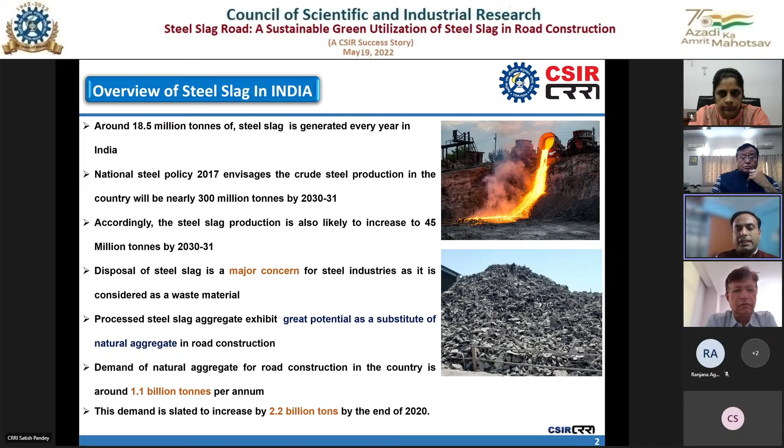By that time, we will have 45 to 60 million ton annual steel production in the country, and the disposal of such huge solid waste will be a challenging task to the steel industry. On the contrary, for the construction and maintenance of the vast road network in India, we require 1.1 billion ton natural aggregate annually, expected to increase to 2.2 billion ton in upcoming years under the massive road development program by the National Highway Authority of India, including the National Highway Development Program, Bharatmala project, and PM Gati Shakti Pariyojana, under which several new infrastructure projects are lined up.

Now, what is the Steel Slag Road? This is the road built under CSIR-CRRI technological supervision and guidance using 100% processed steel slag aggregate as a substitute for natural aggregate and good earth. It's a 6-lane bituminous pavement comprising earthen layers as well as an asphalt layer on top. This road connects NH 6 to Hazira Port.

It's a heavy duty pavement subjected to 1200 to 1500 commercial trucks on a daily basis. The major benefit of this construction is that we have replaced the entire natural aggregate and good earth using processed steel slag aggregate. The aggregates are utilized in the construction of subgrade, subbase, base course and bituminous layer.

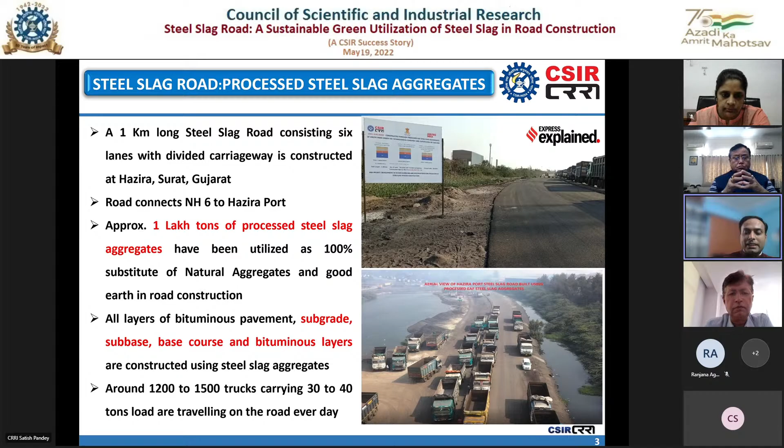Partial utilization of steel slag as a substitute of natural aggregate has been attempted in different parts of the world as well as in India. But the unique feature of this project is that we have replaced the entire natural aggregate and good earth using processed steel slag aggregates. So we built 3 test sections in this project.

The first test section is a control section built for comparative study using conventional natural aggregate. This section is designed for 100 million standard axle repetitions for a 20-year design life. According to Indian Roads Congress prevailing specification, the thickness of the section works out to 625 mm for the road built using conventional natural aggregate.

We kept the length of this control section around 200 to 250 meters. Another test section was built using 100% processed steel slag aggregate without reducing its thickness, with a length of around 300 meters. The third test section was built by reducing the overall thickness of the road by 32%.

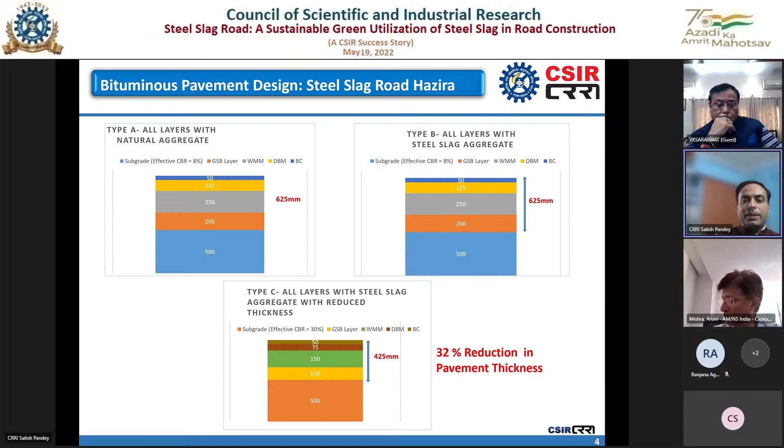So in place of 625 mm thickness, we built the road with 425 mm thickness, and the major reduction was carried out in the dense bituminous macadam layer and wet mix macadam layer, which are considered the costliest pavement layers inside the pavement structure. With the help of that, we significantly saved the construction cost. We evaluated this completely...

I think there is some connection error. Satish ji, are we connected? I think we have lost him. Yes, I think we have lost him. He will reconnect again.

Shall we move ahead with our next speaker? Let Satish ji come and join. Satish ji? I think, Dr. Shikha, can you call him, because this was a very interesting part. Yeah, actually we would like to hear first about the technology.

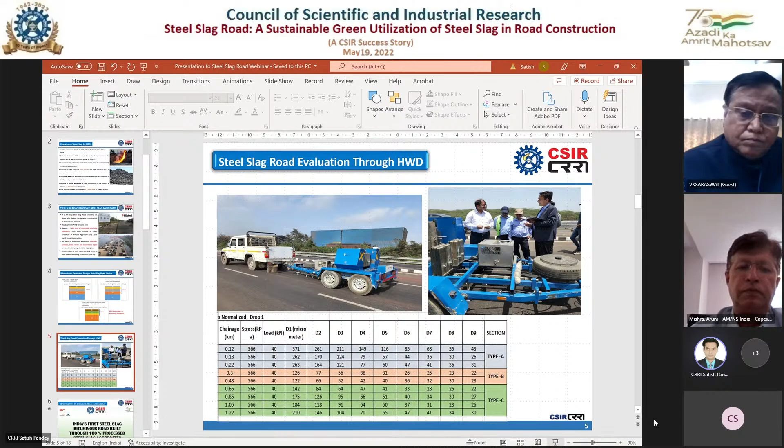In this photograph, you can see the heavyweight deflectometer evaluation carried out on the steel slag road test section. We tested this road as per IRC parameters, and at 40 kilonewton load, the deflection in the road built using natural aggregate is around 371 to 260 micrometer. But compared to the road built with 32% reduced thickness, there is a significant reduction in pavement surface deflection, by 50 to 60%.

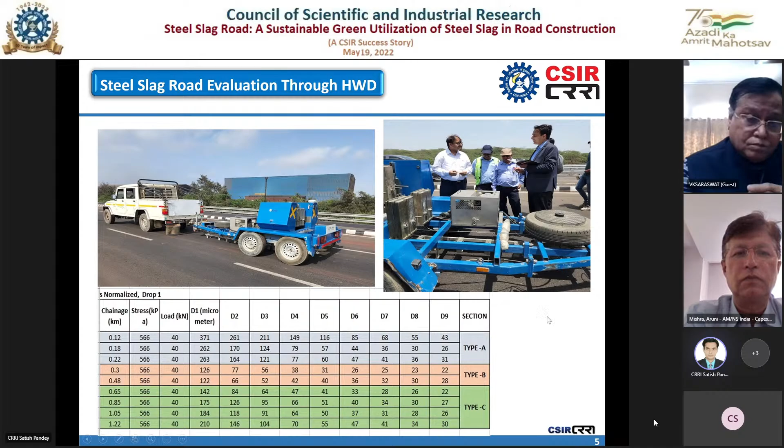By virtue of that, this road is considered stronger than the road built through natural aggregate, and we can effectively reduce its overall thickness by 30 to 40%. This is one of the major benefits of constructing a road using 100% processed steel slag aggregate. We can not only prolong the service life of the pavement, but also conserve natural aggregate and national resources for road construction in the country.

Now this is a small video which shows the journey of the steel slag road construction and processing. I'm just playing it so you can have a glimpse of it.

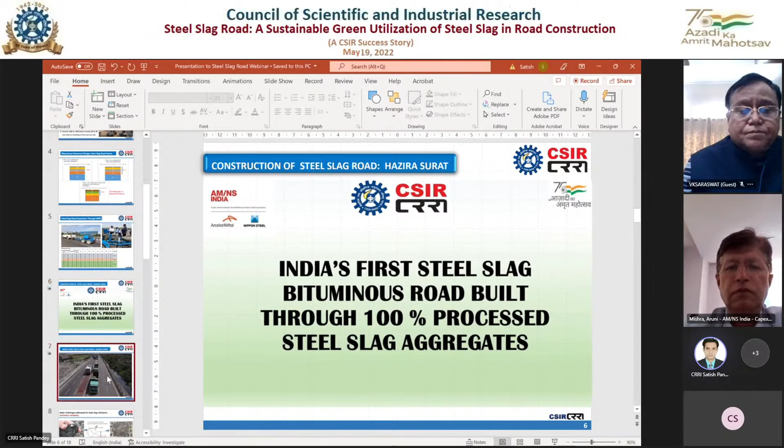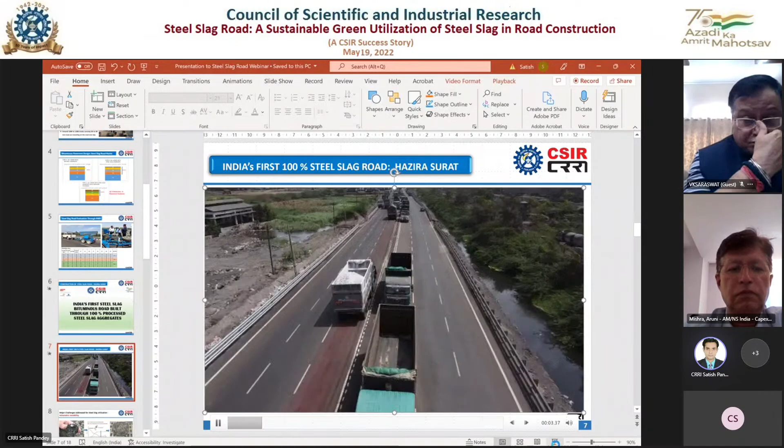This particular short clip gives an aerial view of this road, showing how it looks after construction. We evaluated this road on different serviceability parameters, and it is meeting the different parameters laid down for the construction of national highways in the country.

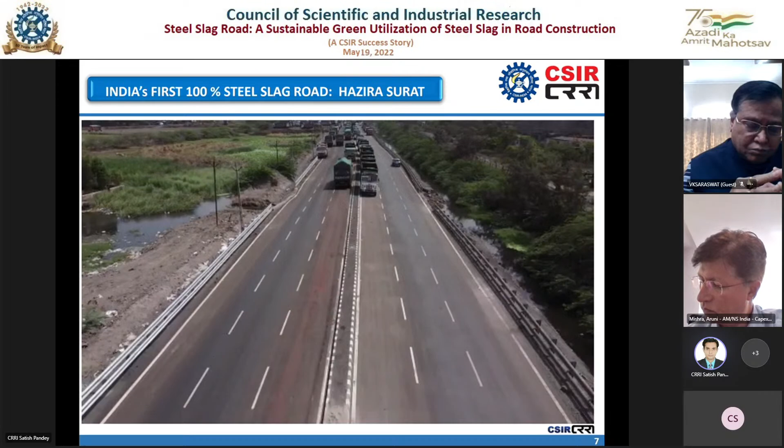This is a glimpse of an overall road, showing what type of traffic it is subjected to. This entire pavement is constructed using 100% processed steel slag aggregate, including median, shoulders, and side drains, all built through processed steel slag aggregate. So it does not contain any natural material inside it. Only in the top layers is bitumen used along with the processed steel slag aggregate for construction purposes.

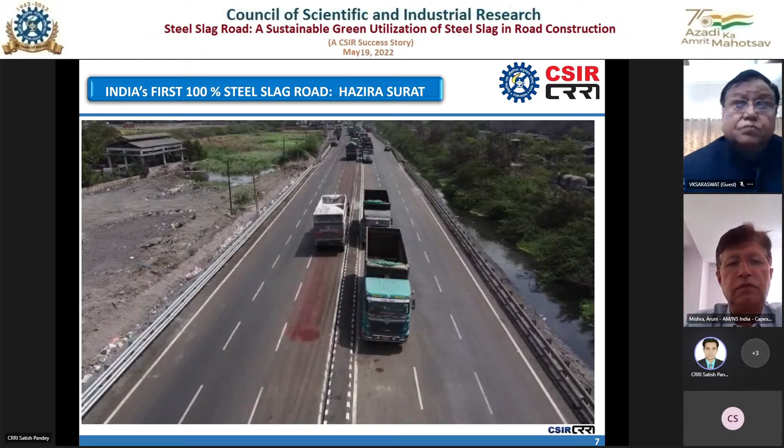The different types of challenges we addressed for steel slag utilization in this journey include volumetric instability, as steel slag shows volumetric instability due to the presence of free lime and magnesia. So we modified the steel slag cooling process so that stable mineralogical phases can be formed, and the requirement of weathering can be further reduced. This sort of distress cannot occur in the pavement when processed steel slag is utilized for construction purposes.

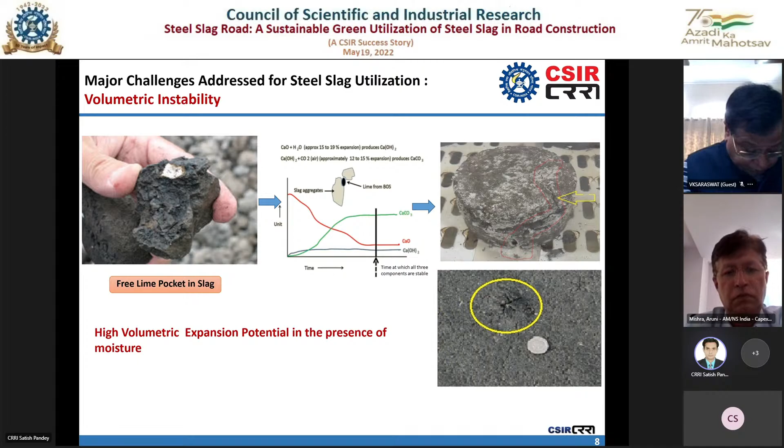The second important challenge is tufa formation, since steel slag aggregate normally contains high amounts of calcium oxide, between 45 to 54%. This calcium oxide, by virtue of the carbonation process, forms calcite deposits on the surface, which can impede the drainage characteristics of the pavement layer. With the help of altering the slag cooling methodology, as well as modifying the weathering process, we can reduce this tufa formation in the steel slag aggregate.

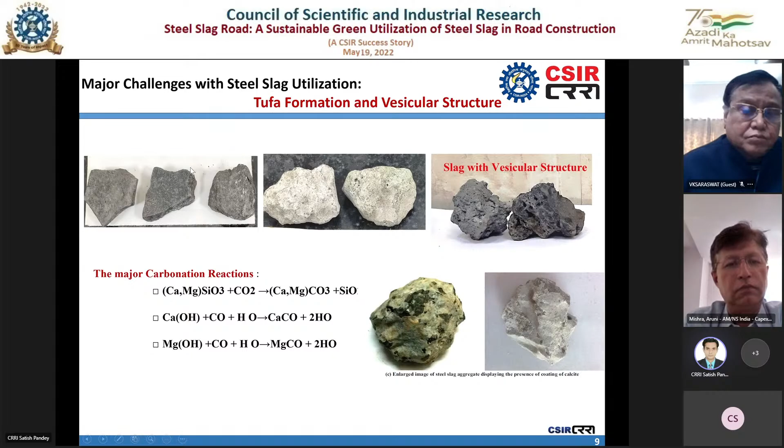The third important aspect is the vesicular structure of the slag. Conventionally, steel slag looks like that, but with the help of modified steel valorization technology developed under this study, this vesicular structured slag is successfully converted into the form of an aggregate. This is a glimpse of processed steel slag aggregate, which looks like a good quality natural aggregate, so it can be utilized without any issue in road construction work.

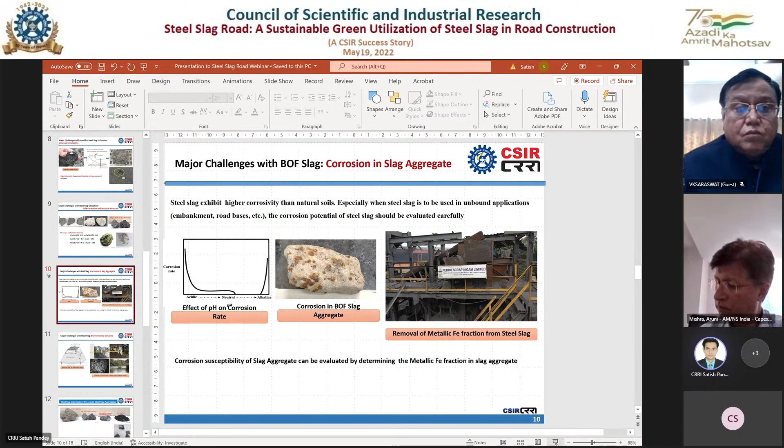The fourth important aspect is the chance of corrosion inside the pavement mass. If slag is utilized for construction work, there may be a probability of corrosion forming on the steel slag aggregate surface. So we developed a customized process to reduce this corrosion aspect by limiting the metallic iron presence inside the slag aggregate. Ideally, the metallic iron content inside the steel slag aggregate should not be greater than 3%.

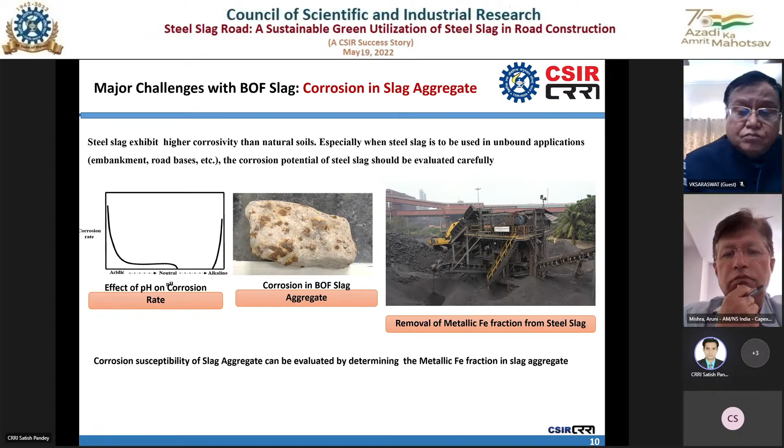Accordingly, we set up the entire process in this FSNL plant situated at AMNS Hazira. It's a magnetic drum separation process. We customized the gauge setup inside this magnetic separation process so that it can effectively reduce the metallic iron content from the slag. Once it is less than 3%, it can be utilized without any issue for road construction activity.

The last but not least challenge is the possibility of heavy metal leaching. If unprocessed slag is utilized in bulk quantity for pavement construction, there are chances that high pH leachate can emanate from the slag deposits, contaminating nearby water bodies and land. But when processed steel slag, which has stable mineralogical phases, is utilized for construction, these aggregates do not show any leaching under adverse environmental conditions.

We conducted TCLP tests with the help of the National Environmental Engineering Research Institute, NEERI, Nagpur, and none of the processed steel slag aggregate exhibited any heavy metal leaching during this testing process.

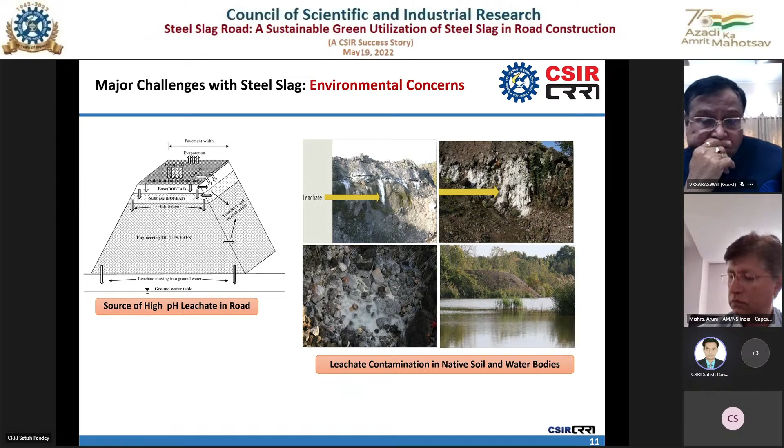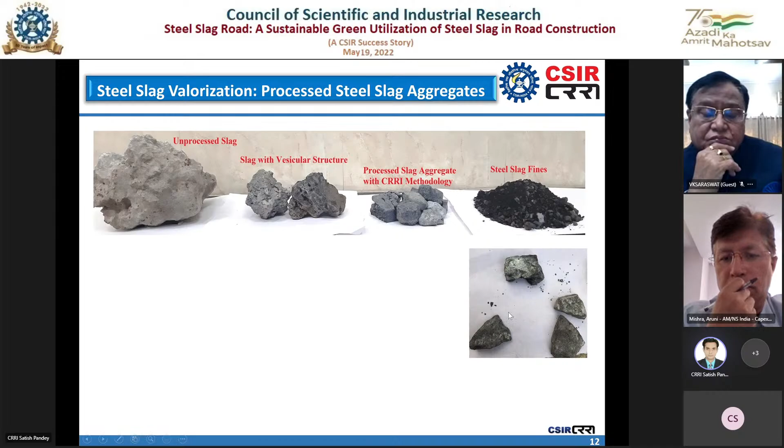This photo gives a glimpse of the conversion of steel slag into processed steel slag aggregate. In the first pic, you can see the unprocessed slag. The second one shows the slag with vesicular structure. The third one is the processed steel slag aggregate emanated out of the CRRI study. The fourth one is the steel slag fine, which we utilized for construction of subgrade and embankment in this particular project. This is a closer view of the processed steel slag aggregate emanated out of the CRRI study.

In terms of techno-economic feasibility, the processed steel slag aggregate costs between 150 to 220 rupees per ton, particularly at AMNS Steel Surat, Hazira plant, while in nearby areas, good quality natural aggregate is available between 250 to 475 rupees per ton, depending upon size.

Since this aggregate has a slightly higher specific gravity, the per-ton transportation cost of this material is comparatively higher than natural aggregate, but this increase in transportation cost can be easily overcome by the lower initial production cost of the slag.

So at last, this utilization is not going to become uneconomical, and in case we reduce the overall pavement thickness, then the road construction cost can be further reduced by 30 to 40%.

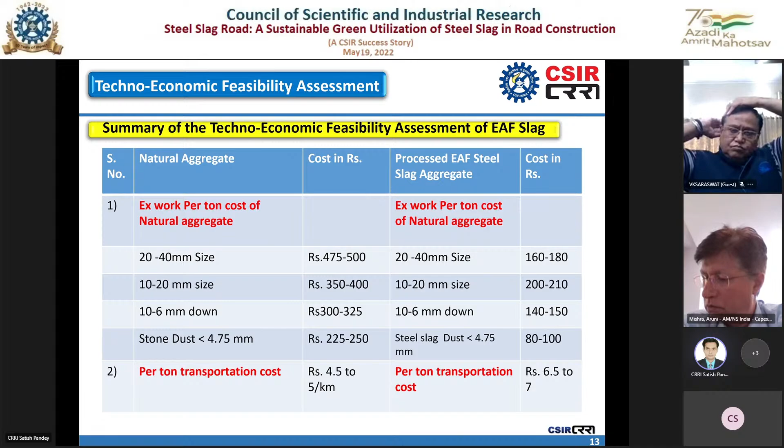So one of the major interim findings of this particular study is that processed steel slag aggregate can be utilized as a 100% substitute of natural aggregate in all layers of bituminous pavement, including median and shoulder portion.

Load carrying capacity of steel slag road is found far better than the road built through natural aggregate. We even applied load up to 140 kilonewton, which is far higher than the specified limit in the Indian Roads Congress guideline, but at 140 kilonewton the measured deflection is comparatively lesser than the deflection measured in the road built through natural aggregate.

The riding quality parameter of steel slag road is at par with the road built through natural aggregate, while steel slag road is even exhibiting better skid resistance under wet conditions. So this is another important benefit of using steel slag road.

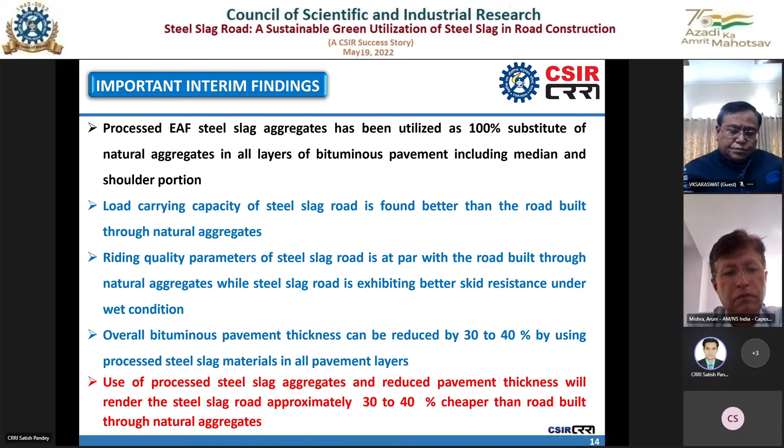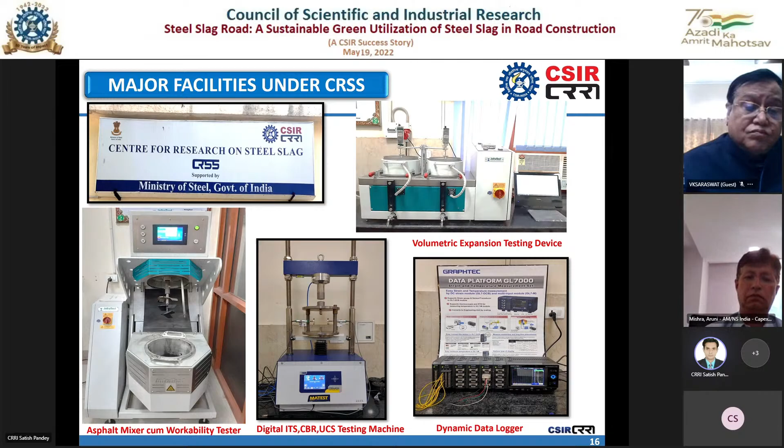Under this particular study, we also developed the Center for Research on Steel Slag with the financial support of the Ministry of Steel in the CRRI campus. This setup is equipped with state-of-the-art facility to characterize the steel slag aggregate and to facilitate its long-term utilization in road construction activity. So these are the major facilities under CRSS in the CRRI campus.

Now that's all from my side, and I give thanks to all the participants for attending this presentation.